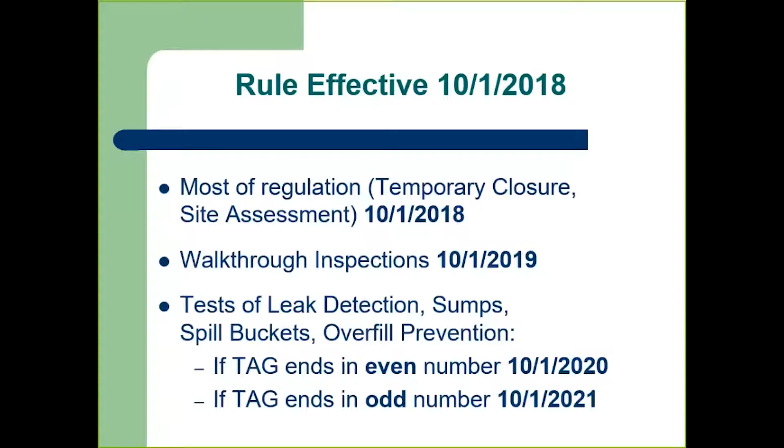Okay. So, exemptions. We did change a major definition in exemptions. So, heating oil tanks have always been exempt. We did change one word in the definition because there has been this little gray area. So right now, the new regulations state tanks used solely for heating structures on the property are exempt from the underground storage tank regulations.

So what that does is it closes this gray loophole for emergency power generator tanks. If they store heating oil, they are fully regulated. So an emergency power generator tank could have waste oil in it. It could have diesel in it. It could have heating oil, whatever. It's fully regulated no matter what kind of product it has in it. So I just want that to be clear.

There are some emergency power generator tanks out there that are not registered with Department of Ecology. So be sure, if you have any of these clients, or if you're a hospital and your tank isn't registered, be sure by October 1st, 2018, you get that emergency power generator tank registered with Department of Ecology and in full compliance with the regulations.

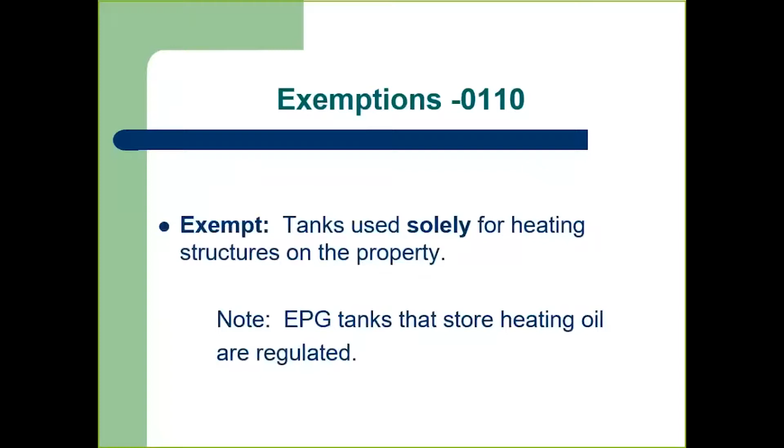Record retention. We've had some changes with that. So for the annual line tightness test, keep the last two tests, 2 years. For walkthrough inspections, rectifier inspections, the monthly leak test, if they're doing a 0.2 gallon per hour test, if they're doing a sensor normal test, all those monthly tank records or line records, keep all of those records for 3 years. We used to be 5 years, so we've shortened the time period for record retention on most of those items. There are still a lot of 3-year tests out there and new 3-year tests that are coming.

So CP tests are normally 3 years, the spill bucket test, overfill equipment, sump test, and if you have a non-safe suction line, those tests are every 3 years. Those records, we want the last 2 tests, which is a 6-year cycle. Okay.

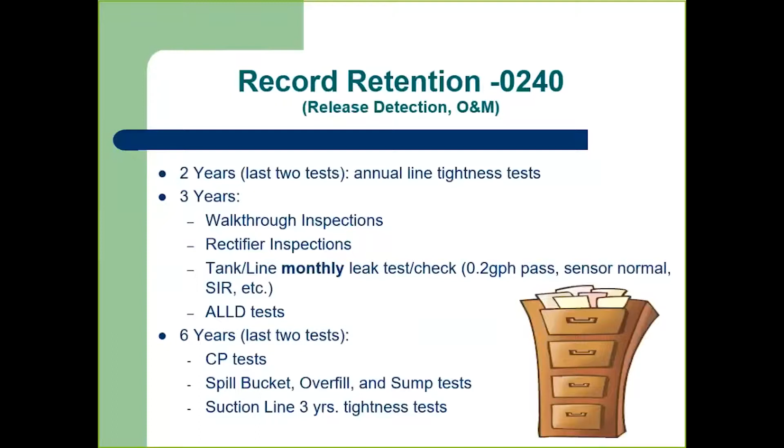Transfer of records. Right now, there's very little information an owner has to pass on to a new owner when they sell their tank site. So now we have a whole list of things that the current owner has to give the future owner if they sell their site. So you can read all this in the regulation, and the little one-page sheet, 2-sided, is a summary of this whole slideshow. So we've got installation repair, compatibility documents, walkthrough inspections, leak detection printout, rectifier inspections, testing of tanks, piping, CP systems, leak detection, spill buckets, overfill prevention, and sump tests, site assessments and cleanup actions.

Last, financial responsibility. So someone yesterday asked, well, how many of these records? So the regulation is silent on that, so we would look towards the record retention section. So if it's 3 years, give them the last 3 copies of the last 3 years. So this will help. Right now, a lot of times when I go to new tank owner sites, they're like, I don't have any records, nothing. So it'll help them become more educated on their new tank system too. A lot of these owners are brand new to tank systems.

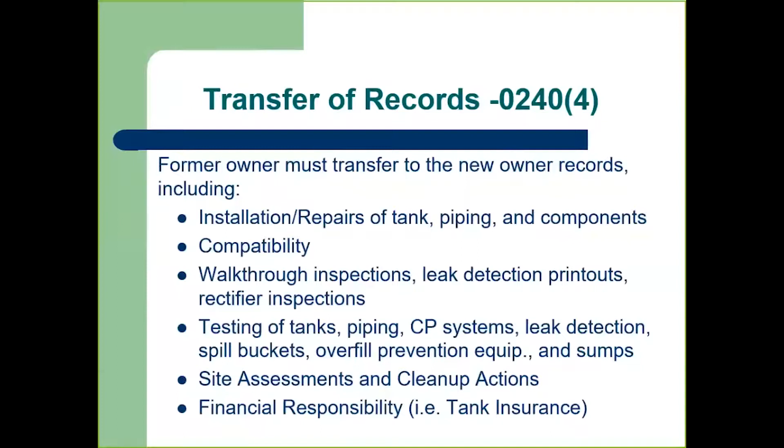30-day notice. Right now, fill out the form as an owner. There's an address on the back. It's an Olympia address. Right now, you need to mail that U.S. Post Office to Olympia. If you wanted a waiver of that 30-day wait time, or if you had a change in the date that you were going to install your tank, you always contact the inspector in your area. So if you're in Seattle, you would contact Drew Imke. He's the inspector for Seattle. So the new regulation says if that install date changes, we want 3 business days prior notice. So you can't tell us Friday about a Monday change. It's got to be 3 business days.

Another change is the 30-day notice was always for new tank installation, but if you were replacing a fiberglass line with a new fiberglass line that was same for same, all you did was use the retrofit repair checklist. Well, now we've added a 30-day notice if you're replacing piping or installing new piping. So we want that 30-day notice of the piping replacement.

Installation changes. Do we have any installers in here? Okay. So right now you fill out your UST addendum, documenting that you followed all codes of practice, regulations, that you did the install per manufacturer specs. You fill out that UST addendum, give it to the owner. Now you're going to attach the manufacturer's tank install checklist, and that's usually a 30-page checklist. Sometimes it's known as a warranty checklist. So if you're installing a Xerxes tank, you fill out the Xerxes 30-page install. You want to attach a copy of that to the UST addendum now so the owner can submit all that to Department of Ecology for their new tank install.

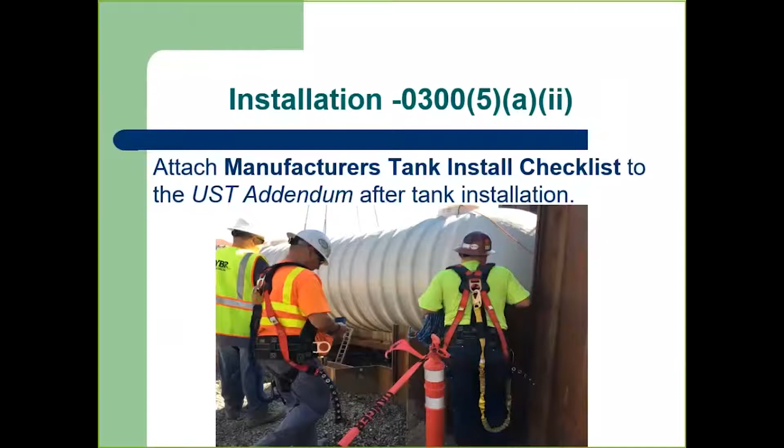Double wall and interstitial monitoring. So, grab some water.

The 2005 federal regulations said all the states had to come up with rules at least as stringent as the feds, and they wanted double wall tanks and double wall piping if any new installs happened. So every state has a different date on this. So if you do work in Oregon or Idaho, this date might be different.

So in Washington State, our date was October 1st, 2012, that you had to have double wall tanks or double wall piping. And why this is really a critical date with these new regulations is this instituted mandatory interstitial monitoring as your primary form of leak detection for your tanks and piping installed on or after October 1st, 2012.

So the new regulations are going to have some things that kick in based on if you're required to do or choose voluntarily to do interstitial monitoring as your primary form of leak detection on your piping; some new regulation is going to come into effect.

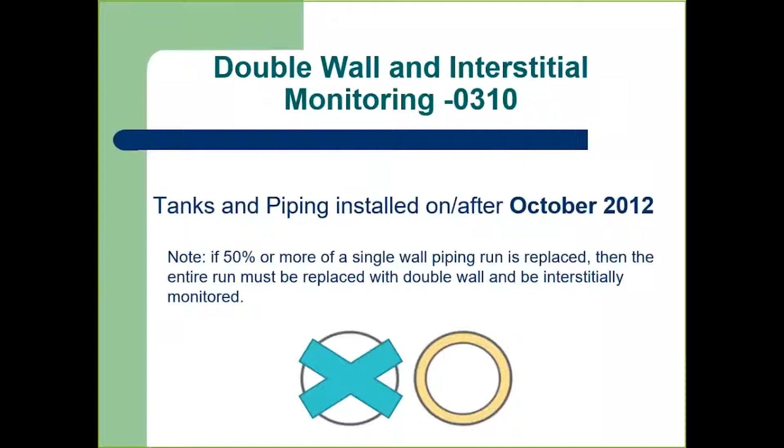So if you have a single piping run and you want to replace 50% or more of that pipe, you have to remove the whole piping run and replace it with double wall pipe. And it must be interstitially monitored. That was October 1st, 2012. So if you do less than 50%, you could just continue on with single wall piping. So 50% is our cutoff for that replacement into a double wall system.

Under dispenser containment, the date here is also October 1st, 2012. If somebody had a dispenser replaced, put a new dispenser on, or just added a new dispenser at a site, they had to have an under dispenser containment sump. And safe suction systems are not exempt from this requirement. So you could do Bravo boxes, you just have to have a containment sump.

People have asked, since there have been some companies going around, can we do a spray-in sump? No, I don't know any manufacturer of any piping that's allowed that next to their piping. So we put in the new regulation that it must be a manufactured sump or like a machine shop sump. I think you've seen a lot of those steel sumps that people can make; a lot of them are at marinas. So spray-in sumps will not be allowed, and that's in the regulation.

Yes. So the question was, would they have to replace the other three that they didn't voluntarily want to replace? Anytime an inspector goes to a site, they're looking at every piece of equipment per our checklist and seeing if that equipment meets the minimum standards, performance standards of the regulation. So we would be looking at a spray-in sump to see if it met the regulations, just as we would be looking at a manufactured sump.

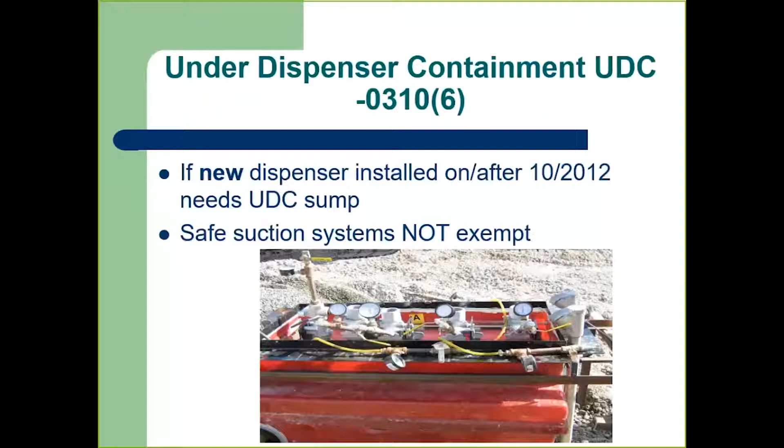Compatibility. Tanks have always had to be compatible with the substance stored in that tank or piping. Now we have an additional part to the compatibility section. If someone is going to switch to greater than 10% ethanol, greater than 20% biodiesel, or switch to a hazardous substance, they must prove through their records, by certification by an independent testing laboratory like UL 971, manufacturer approval, or another option.

A lot of you know how to go onto the NWGLDE website and look up third-party certifications. I think some of the compatibility you're going to be able to find on that website. So if you have an owner that's going to do this, let's go to the next slide.

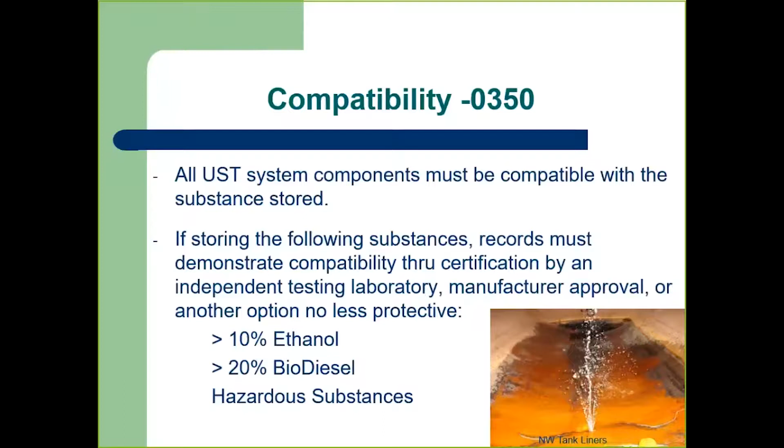The change in product, let's look at the bottom half. If you're switching to greater than 10% ethanol, greater than 20% biodiesel, or a hazardous substance, it now requires, after October 1st, 2018, a 30-day notice prior to switching to one of those products. And we have a checklist already online. It's called Alternative Fuel Installation or Conversion Checklist. And that outlines every UST component that comes in contact with any of these products, and you must show proof that it's compatible with these new products.

Today, a lot of people have gone to blenders. They've gotten rid of their mid-grade tank. They want their mid-grade now to be diesel. They blend. So nothing's changed there. It's still within 30 days of changing that product. Fill out that retrofit repair checklist. Make sure you've changed the floats if they needed to be changed. And just use that retrofit repair checklist within 30 days of switching from gas to diesel. That doesn't need a 30-day prior notice. So I'm not sure the webinar people heard that.

There was a question about E15. Federally, there's been a lot of talk of that happening soon, but in Washington State, there has not been talk of a switch to E15 anytime soon.

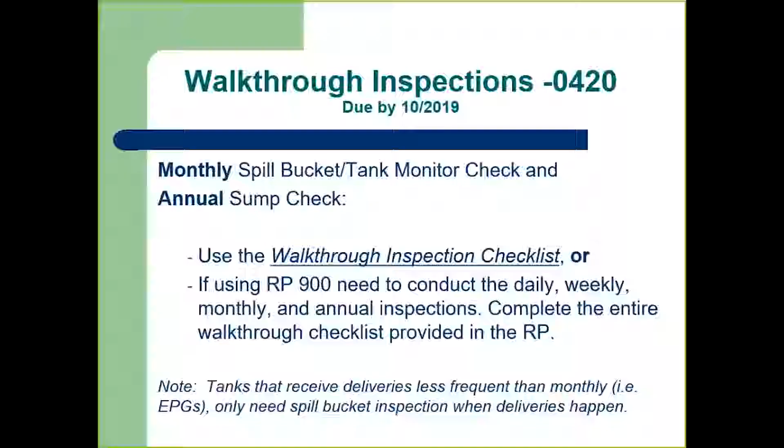Or let's say you go to the rectifier and it's just zero, like you had a lightning strike this week. That happens quite often. You must call your tester or a CP expert within 24 hours. And do we have any CP testers in the room today? Okay. So when they call you, please make sure they schedule an appointment with you to get that repaired or looked at.

The full question was, if we have two dispensers, only one of them was hit, they're both direct bury over soil, they had to replace the one dispenser, put an under-dispenser containment sump due to the regulation October 1st, 2012. Now, because of electronics talking to the meter back in the office, the compatibility, they have to change the other dispenser, which then triggers that dispenser under-containment sump also. So in that situation, both of the new dispenser replacements would need sumps under the dispenser.

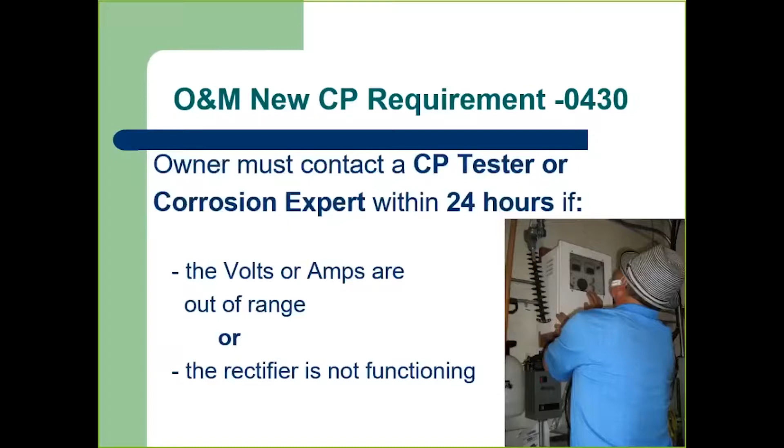Okay, so let's get into the operation and maintenance sump 3-year test. Tag even number ending is due by October 2020. Tag odd, October 2021. So the sump every 3-year test is only required if you are using interstitial monitoring on your piping. So there are some owners that may opt, since their piping is older than October 1st, 2012, to switch to an annual line test. That is perfectly fine. They can switch to an annual line test, don't have to do the 3-year sump test.

However, just to show how we're a little bit different than Idaho or some other states, if you work in both states, please keep your sump sensors in there. Just because you're going to a line test doesn't mean you should get rid of perfectly good equipment. When an inspector goes to your site, they only look for your primary forms of leak detection. So if you have a pressurized system, we're looking at your automatic line leak detector, that test. We're looking at your annual line tightness test. Okay, so you're in full compliance now with your line testing. If you have sump sensors, that's your deal with your service provider. If you have a leak, that sump sensor is going to alarm. So please don't take them out, even if you go to an annual line test.

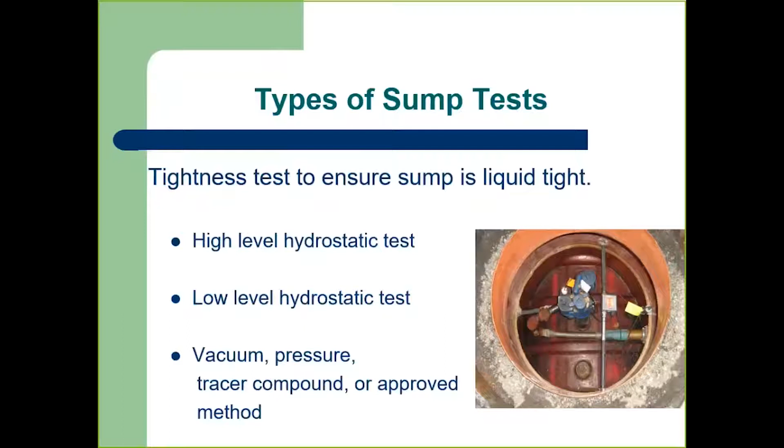So if you're doing interstitial monitoring on your piping, which of those sumps needs the test? It would be every sump in that piping run that's part of the interstitially monitored system. So on your typical, where you have your dispensers at a high elevation, a transition sump, STP sump, low elevation, it includes the dispenser sumps, even a closed loop system, because you have a single wall riser pipe up to the shear valve that's exposed. So that sump is acting as part of the interstitial system. So closed loop systems are not exempt from the sump being tested.

Question. What fluid is being used for the hydrostatic testing? RP 1200 is water. I have not seen a hydrostatic test other than water. However, for the tracer test different compounds are used, but it's more of a vapor compound in a smoke. It looks kind of smoky if you see it done. You can maybe Google that and see some good YouTube videos. If you were around during the tracer test of the tank, it's similar to that but easier. It's not like you had to wait a long time in the old days. This is pretty instant. Okay, I think that answered the question.

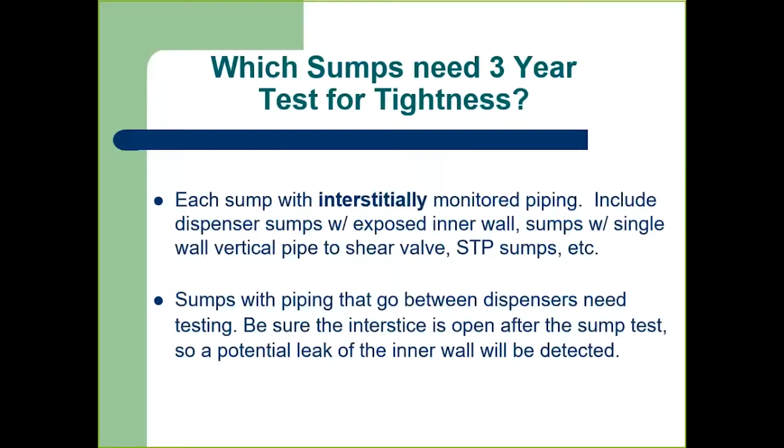O&M spill bucket 3-year test. Same thing for existing tanks. That would go into effect even tag 2020, odd tag 2021. You can follow a manufacturer instruction or a code of practice, or something at least as stringent as that. So a code of practice that's out there is RP 1200. They have a lot of O&M, how to do these tests.

Okay, there is an exception for the spill bucket test. If you have a double wall spill bucket and you have it interstitially monitored and you're documenting that on your walkthrough checklist, every month I'm checking the interstice, inside and the interstice. Then if I've got 3 years of records of those, I don't need to do the hydrostatic 3-year test on that spill bucket because I'm monitoring that interstitial space every single month. So that gets you out of the 3-year hydrostatic.

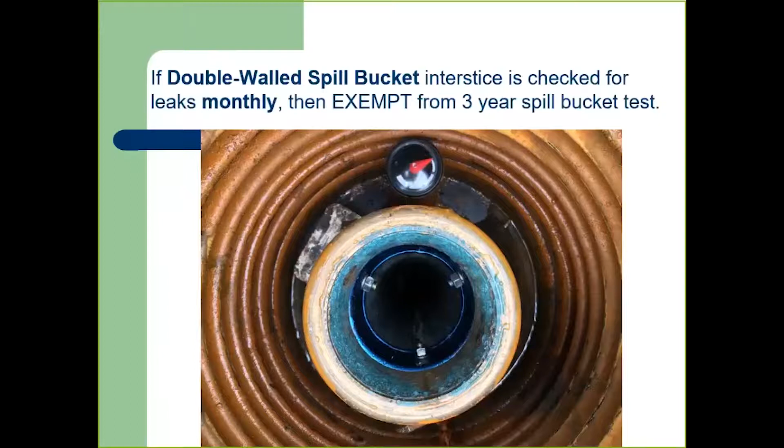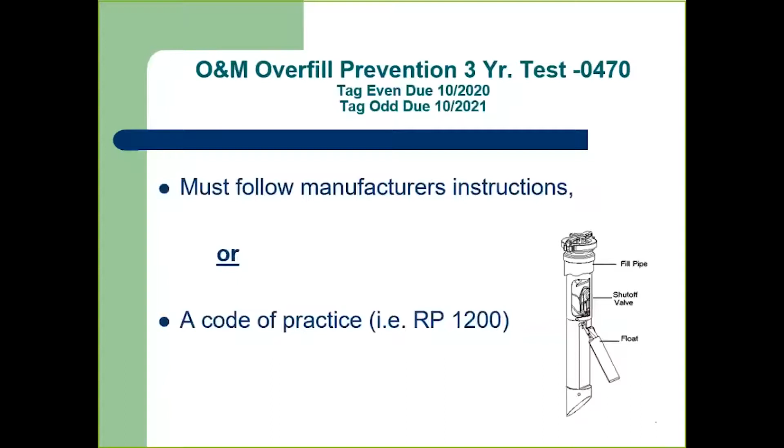O&M testing for overfill prevention devices goes into effect even tag 2020, odd tag 2021. You can follow manufacturer's instructions on how to test that every 3 years, or a code of practice such as RP 1200 has great instructions on how to test each of these equipment. So there's 3 most common types of equipment. So a lot of people in their fill pipes have an automatic shutoff valve.

So contrary to what you may see at some of these tank conference shows, there's a magnetic one. You can't just look down the fill pipe and use your magnet and say, yes, the arm is swinging, because you can't see that arm swinging. So EPA's interpretation is you need to take the entire automatic shutoff tube out. It's got to completely come out.

You've got to check everything, make sure it's per manufacturer specifications. You've got to check the float. Is it warped? Is it smashed? Is the arm working correctly? Or if it's the slide up and down, whatever type of automatic shutoff, it's got to be working per manufacturer specification.

Now, I have heard from service providers that have done this. Due to the ethanol vapors coming up from the tank, it's rusting a lot of these parts, and they're having a hard time getting these automatic shutoffs out. I've seen some pictures where they've had to destroy the automatic shutoff tube to get it out for inspection. So therefore, it's destroyed, and a new one has to be put in.

Do we have any service providers here that have some experience that could maybe say something to this? Yes? We've kind of started doing this a little preemptively. We've come across quite a few, especially the straight ones that don't want to come out. They haven't been removed in years for numerous reasons, and we are destroying them to get them out. They're about $1,000 a piece that we buy them for.

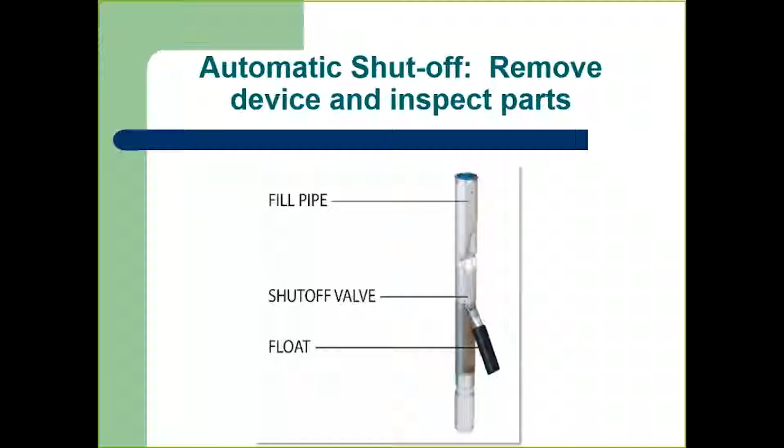What the regulation, operation, and maintenance of your overfill equipment device needs to show during that test is that if I say I'm using my automatic shutoff, that is going to work with whatever tank equipment I have. So that O&M inspection every 3 years has to prove that that is going to activate at 95%. So if I have a hidden ball float valve with a stem at 90%, that is not going to activate my 95% shutoff, even though it appears to be perfect equipment, a float, a moving arm.

So what we had at one of our sites was the ball float disappeared, it got rusted out, but the stem was still in the tank at 90%. The driver just saw the 95% automatic shutoff. So at 2 a.m. when his hose was hooked up and his hose jumped at 90%, he ran back to the ATG: I can put a lot more fuel in this tank. And more fuel and more fuel. All of a sudden, the fuel came up the 90% ball float stem, and the stage 1 vapor recovery went through his hose to the tank, and it spilled out of his hose onto the ground at 2 a.m.

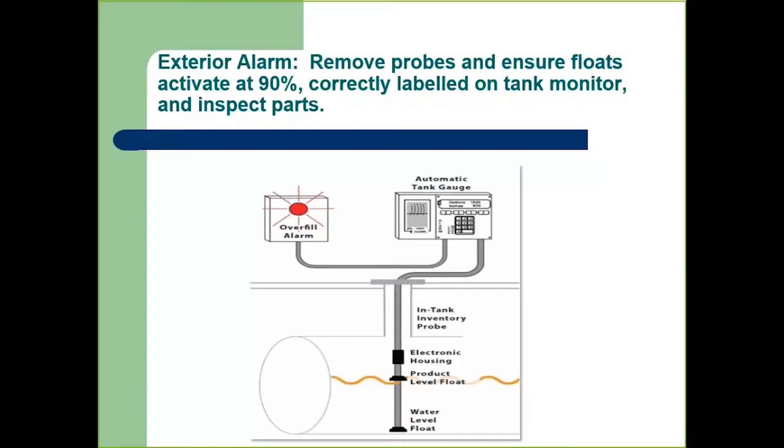Okay, the second form that's pretty common is an exterior alarm. So on this test, this 3-year test, you'll want to remove every probe. Make sure the water floats are good, make sure the correct biofuel or diesel or gas float is used for the product floats, make sure they move freely, and that it activates at the 90% level. So regular, I'm going up to 90%, activate, 90% diesel, on and on. Make sure it's correctly labeled. If you're pulling up the diesel one, make sure it's not the regular coming out of the machine. So, okay.

Ball float. This has also been an area where there's some misinformation out there. October 1st, 2018 is the date that you cannot install a new ball float. So if you have a new tank going in, no new ball float. If you're doing the test, that 3-year test, and your ball float is not functioning per manufacturer's specifications, you cannot repair it or replace it.

So if you have a ball float that's set at 90%, you can't get the stem out because it's rusted because of the ethanol vapors, you have to leave the stem in, then their only choice is to go exterior alarm, because you can't have a stem at 90% and then an automatic shut-off valve at 95%.

Yes? Why can't you lower your shut-off valve to 90% to match your stem? It would actually have to be well below 90% because of how things activate. So you might even have to be all the way to 85%. But that would be an option. A lot of owners might not want that option, but you are correct.

And if no one heard, the question was, instead of going to an exterior alarm if the ball float was damaged or wasn't working, could they go to an automatic shutoff that was set below the stem percentage inside the tank?

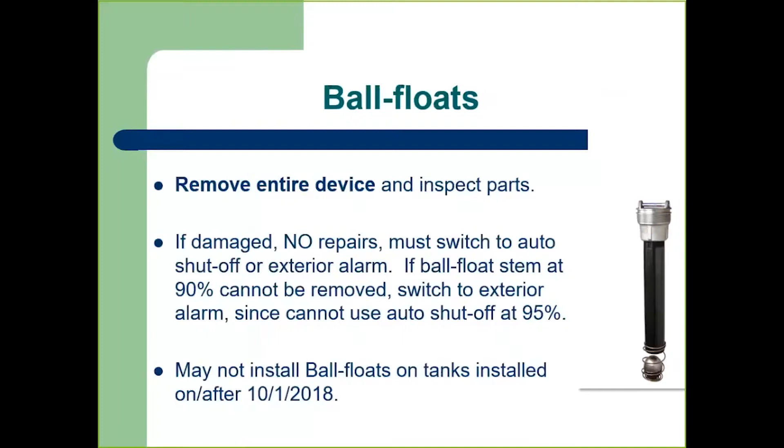So just a reminder, no new ball floats installed after October 1st, 2018. However, every existing functioning ball float can stay in the tank forever as long as it meets manufacturer specifications.

Release detection equipment, that's an annual test. Tag even for existing tanks 2020, tag odd for existing tanks 2021. This is also known, in the industry, as your monitor certification. Crystal's going to go through all this, so I don't want to go through all the different things. But the test has got to follow a manufacturer instruction for whatever type of leak monitor.

If you've got a 250i, you follow what that 250i instruction is. If you've got an Incon 750, you check it per that. So RP 1200 is a code of practice you can use, and you can use that checklist and attach that data to our form.

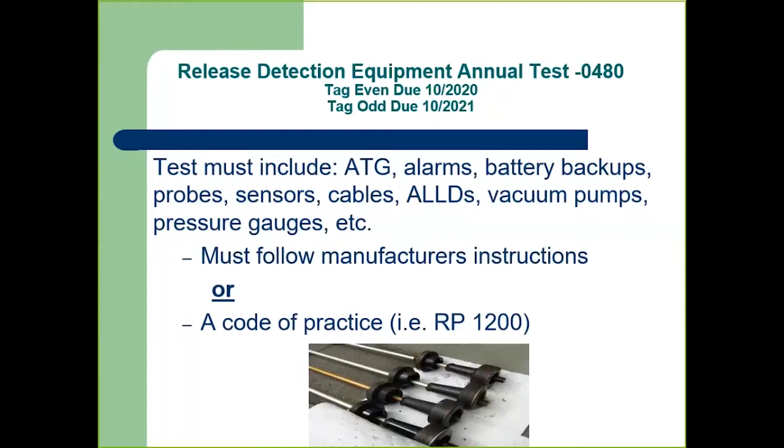Repairs. When you repair part of a tank or a piping, be sure within 30 days of that repair, hopefully before you put any product in it, that you have a third-party certified tank tightness test and/or line tightness test, depending on what you just repaired.

In addition, now that we have requirements on sumps and other equipment, if you repair part of a sump that's used for interstitial monitoring, secondary containment of tanks and piping, like let's say you've got a hole in a piece of fiberglass exterior pipe, whatever piece of UST component you repair, you have to have some type of test to show your repair is good within 30 days. So if it's an interstitial repair, interstitial test. If it's a sump repair, a sump test. Just whatever you repaired, have it tested within 30 days of the repair.

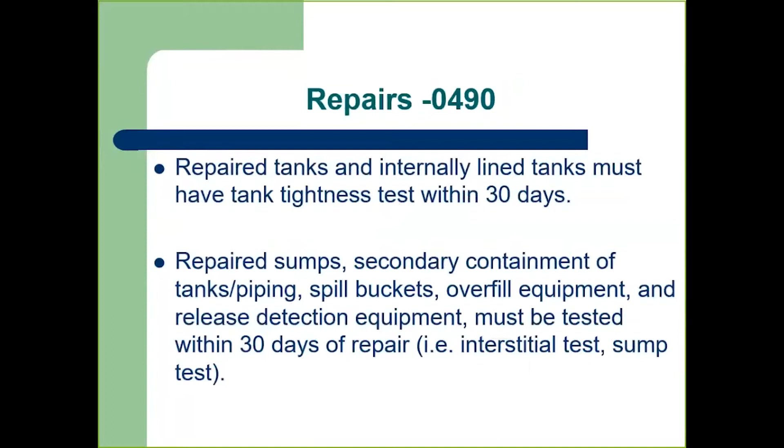Site assessment. Kathy's going to go into detail on the changes in the regulation for site assessments. We used to have the table for sampling in the site assessment guidance. We now created a new table, and it is now in the regulation. It's broken down into 2 sections.

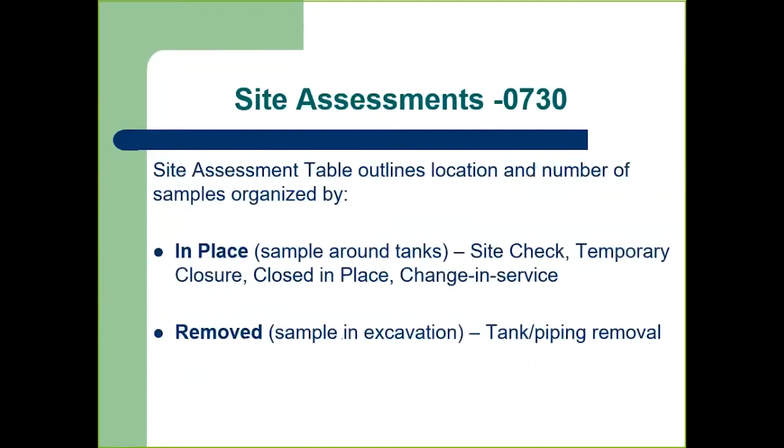One, how you sample if the tanks are in place, with a drill rig. The other half of the table is how you sample if your tank, pipe, or dispenser is removed. How do you do that excavation sampling? So Kathy's going to go into detail on that.

So owners will designate someone to do that monthly check. Crystal's going to go into detail. The annual check, the owner could look in every sump, or if the service provider's there every year, they could use their initials and do that annual sump check for the owners, because service providers usually are safer on site than an owner. So safety number one.

I'm telling owners, whoever they designate to do that spill bucket check, make sure they are protected. I don't want an 18-year-old cashier down on the ground on their knees and be run over by a car. So when I'm on site, I use 2 vehicles to block off the area I'm going to be working at. And those orange cones and tape, that's icing, because people can drive through cones and tape. They cannot really drive through a car. So whoever you designate to do that monthly check, be sure they are safe. And I'm recommending if your service provider's there every year, have them do the sump check for you.

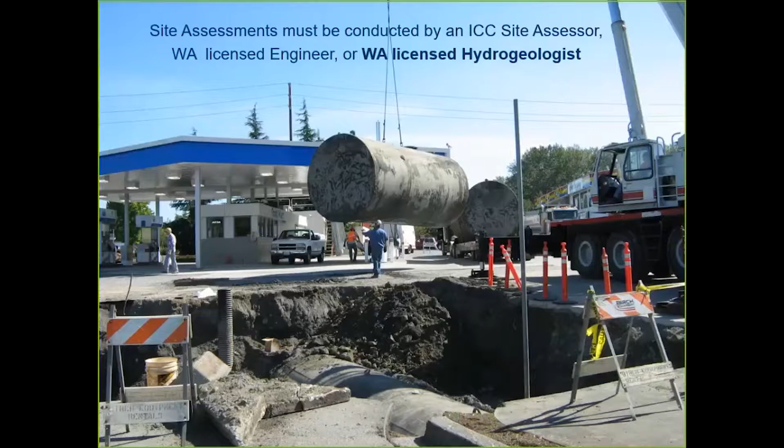Okay, what type of certification do you need for some other testing? So if you have an ICC tightness tester certification, which is known as a U3, or an ICC installer repair certification known as a U1, you can have either one of those if you do an annual test of the leak detection equipment, known as a monitor certification, but complete testing, the 3-year test of the spill buckets or overfill prevention equipment, or the 3-year test of the sumps used for interstitial monitoring. You can have either one of those certifications.

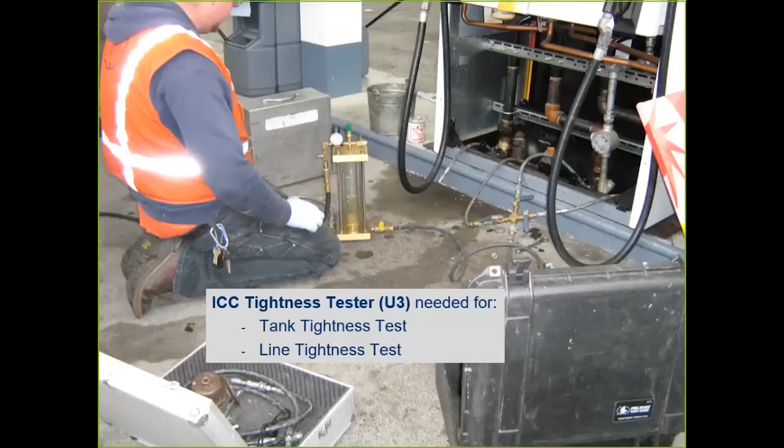However, if all you have is the ICC tightness tester, the U3, you're fully qualified, of course, to do the tank and line tightness test. But if you're an installer, you can't do those 2 tests. You must have the ICC tank tightness tester certification for those 2 tests.

Few changes, or we made it a lot clearer on the CP certification. And if you look at that little handout, I haven't changed a word on your handout. So the first, under 900, an ICC certified tester, known as the U4, can do CP testing, CP install, and CP repair. And there's a little note at the bottom here for all of these. CP install and repair must be designed and under the direction of the CP expert, including rectifier adjustments. So the CP expert does not have to be on site, but you're under their direction. If you're doing an install of new anodes, maybe you're changing the tap settings, coarse and fine.

Okay, second, certifications. If you're an STI certified tester.

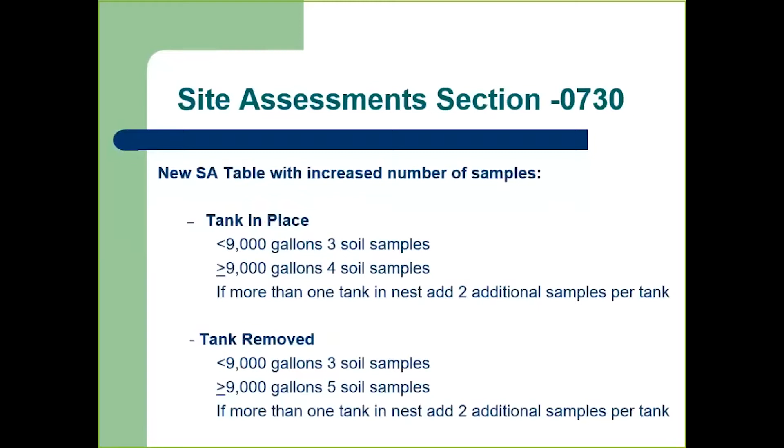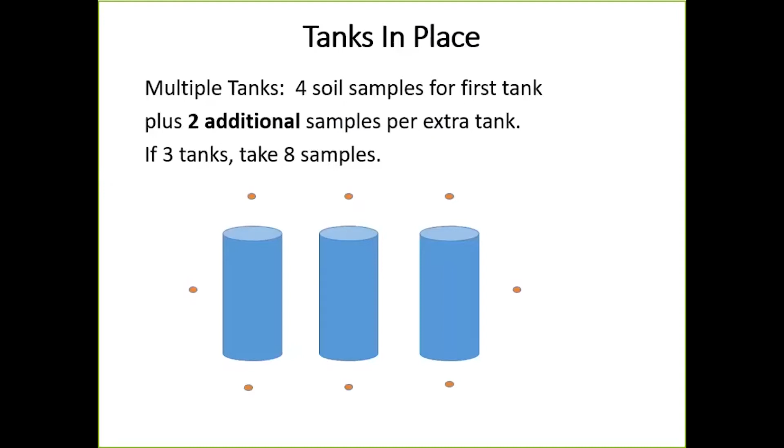All right, so what we've done is we're going to break it down and show you the sampling for a site assessment around the system with the tank still in place. This is an example of 3 tanks. So this would be a multiple tank situation. You would take 4 soil samples for the first tank, plus 2 additional samples per extra tank. So in this example, we've got 3 tanks, so you would collect a total of 8 soil samples.

And for the piping and the dispensers, it would be 1 sample adjacent to, as close as you can get, for every 50 feet of piping, and 1 sample as close as you can get safely adjacent to each dispenser.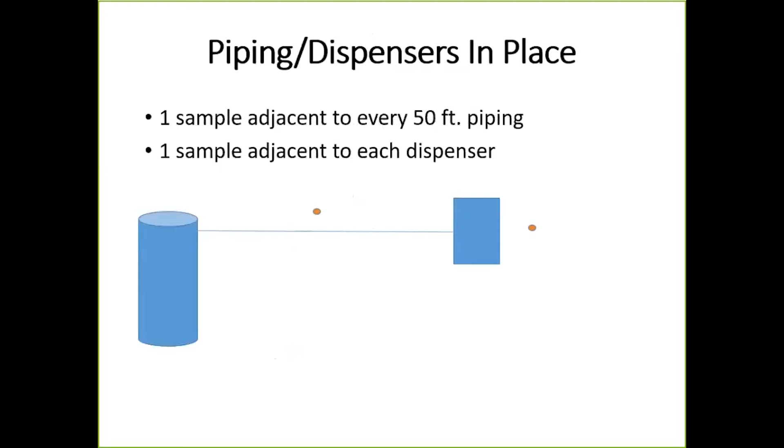And if you have a tank that's greater than or equal to 9,000 gallons, then it's 1 bottom sample, a sidewall where the former piping came in, and all of the rest of the sidewalls. So 4 sidewalls and 1 bottom.

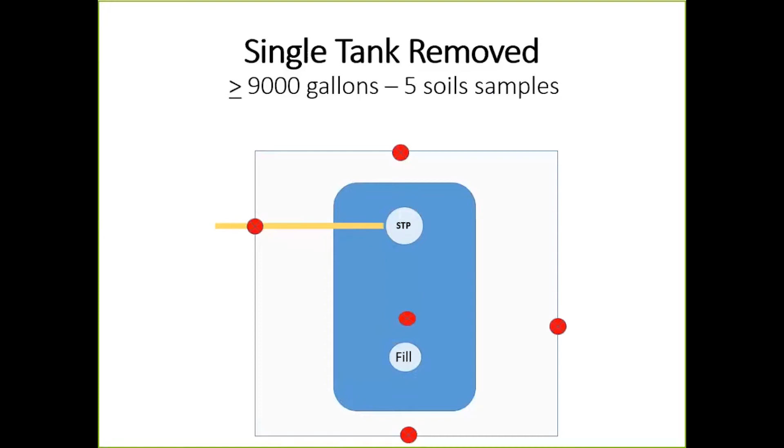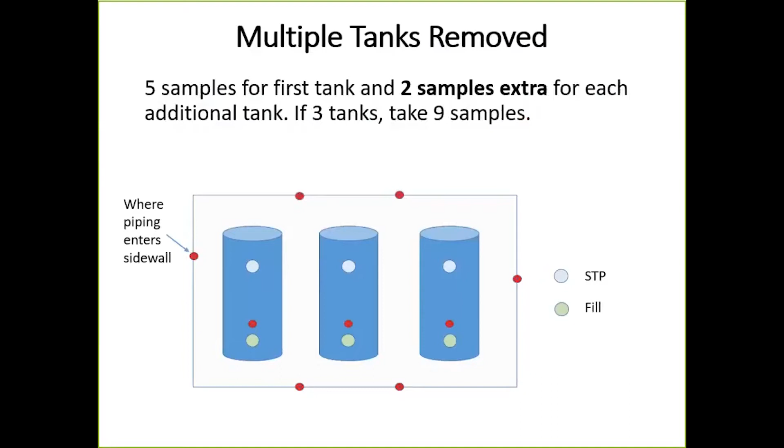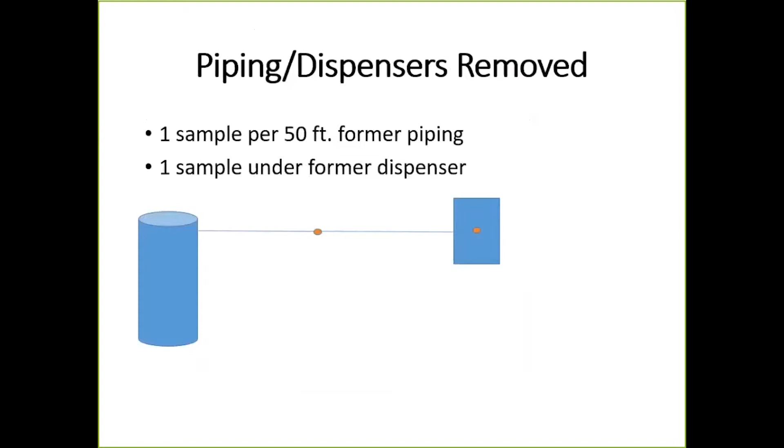And we'll show you a diagram of what it would look like if multiple tanks were removed. You would collect 5 samples for your first tank and 2 samples extra for each additional tank. So here we have 3 tanks for a total of 9 soil samples. And for the piping and dispensers, you're going to collect 1 sample per 50 feet of the former piping and 1 sample under each former dispenser.

And we changed the excavated soils or the stockpiled soils. So for your stockpiled soils, before our minimum was 3 samples. Well, we changed that. If it's less than or equal to 25 cubic yards, 1 soil sample will be sufficient. And less than or equal to 100 cubic yards, collect 3 samples.

Less than or equal to 2,000 cubic yards, you will collect 10 soil samples. And greater than 2,000 cubic yards, your 10 soil samples plus 1 extra per 500 cubic yards. You are allowed to take composites in the stockpiled soil, but we don't want to see composites when you're sampling from the excavation.

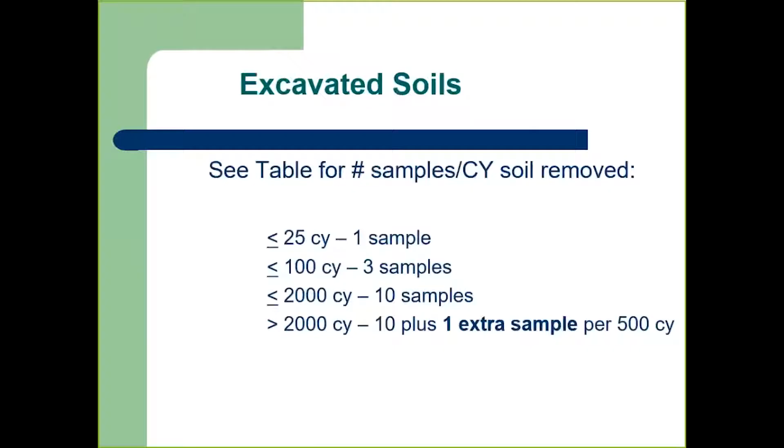Certifications required. Annette touched on this, and I'm going to go ahead and touch on it again. If you are conducting site assessments in Washington State, you need to be an International Code Council certified site assessor or a Washington licensed engineer, and then new, we have approved the Washington licensed hydrogeologist. Does that include geologists? It has to be a Washington licensed hydrogeologist.

Financial responsibility, that's effective October 1st, 2018. And all temporarily closed tanks must have financial responsibility. My sites are federal, so it doesn't apply to them, nor for state facilities. And they can suspend their financial responsibility if they empty the tank and a site assessment is conducted.

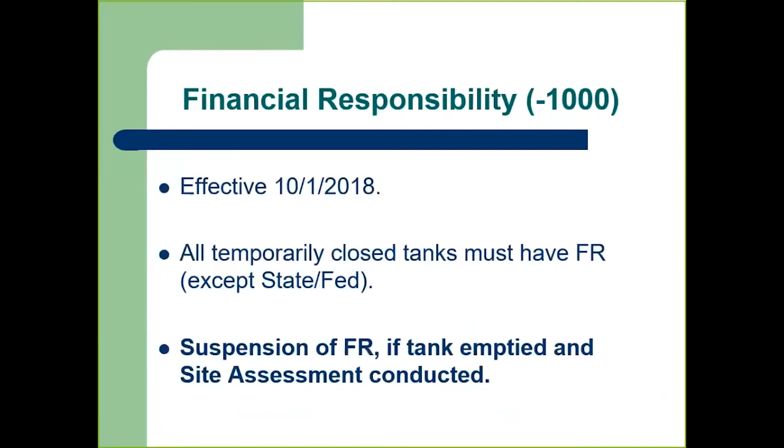And this is a protection for the owner as well, to have that done. Site assessment's a little spendy, but this way it protects them if they find something, and then their insurance will help cover that. And that's it. Short and sweet. Any questions?

Okay, great. Oh, I got one. So for the temporarily closed tanks, if it's closed before the October 1st deadline, do they still need financial responsibility, or is it after?

So the question was, how are temporarily closed tanks that are currently temporarily closed going to be handled with this new requirement? So we're putting a letter together to send to all of the temporarily closed sites at this time. And the short answer is yes, they will need to have financial responsibility eventually, but we're going to work with them on a site-by-site basis to try to find the best option for them to get to that point. Okay, thank you.

All right, so our next presentation is going to cover the checklist. How can I get this open here? And the next presenter is Krista Rodriguez. Krista's a UST inspector. She worked over in the central region based out of Yakima and now Union Gap for a number of years. She's just recently moved into the northwest region and works out of the Bellingham field office. And so she's going to talk about a number of the checklists we have, the most common checklists we have, and go over what our expectations for those are.

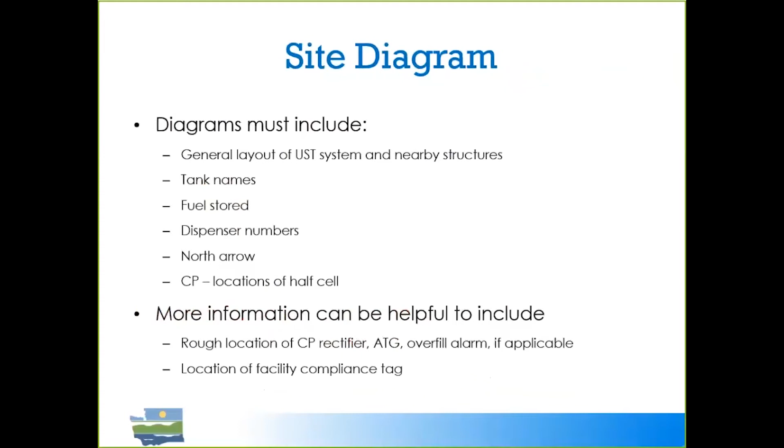Signatures. Each of the forms require the service provider signature and a signature of the representative authority, or I don't remember how it's worded, authorized representative. We may be rejecting those in the future if we don't have some sort of signature from the site, somebody from the facility, and we're kind of working on how to manage that. We know we would prefer to see the signature on that same form if you can get that, and I'm seeing some, oh, that's impossible.

We know this is really difficult, and we're trying to come up with some creative ideas on how we can get that signature so that we know that there's been some communication, we know that they're receiving the failed results. That's the main goal, is we're wanting to make sure that everyone's on the same page. So you can talk to Chris about that. If that's just impossible for you to get that signature on there, Chris is probably the best person to talk to about what's the easiest way for you guys to get that taken care of, or what you can provide to us to substitute for that.

So the next one is the leak testing checklist. As Hugh mentioned, we've got the date right on the top there. That's kind of a goal. We'll get that on all of them when we update them this next time. The leak testing checklist was updated in March 2016, so this should be the form that you're using. And it included a requirement to document the certification type for each service provider, and for you to be including the supporting documentation, so not just the ecology checklist.

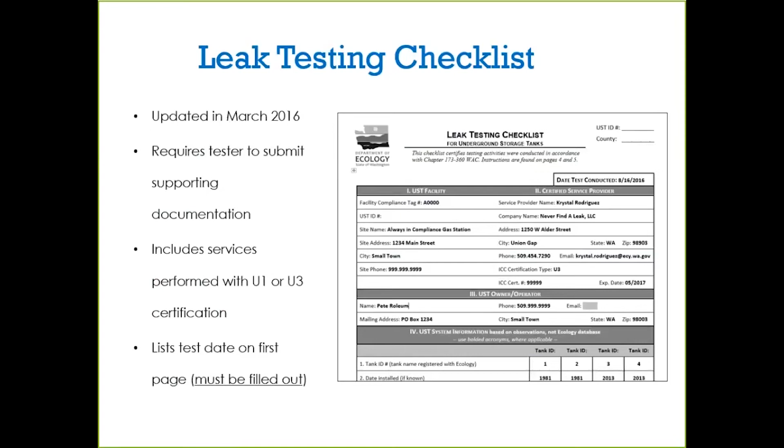This section is sort of the nemesis of everybody. What we tend to be seeing is this section being filled out based on what's in our database. And what we want to see is what you're seeing on the ground, what you're observing on that day. So there are plans to probably change this section, so we're maybe just having the tank ID, capacity, product stored, more information that's really useful to us. Like I said, we want it to be based on your observation.

Question? Yes. For new installation, we do the hydrostatic test at that time when the excavation's open. Then when our paperwork's going to be turned in for the tank information and it's completed, there'll be 2 different dates on it. Is there a spot for that? Because when we finish the job, after we set the dispensers on there, fully operational, it might be 30 days out. So 2 different dates from the hydrostatic test and the tank checklist.

So the question is if there are 2 different dates for a new install on the hydrostatic testing versus maybe the tightness testing of the equipment. I think that you can fill out 2 different forms for that. We want the form to be for one date that all the testing was performed. So if you have completed those on 2 separate dates, especially if they're 30 days or 2 months apart, I think 2 forms would make sense.

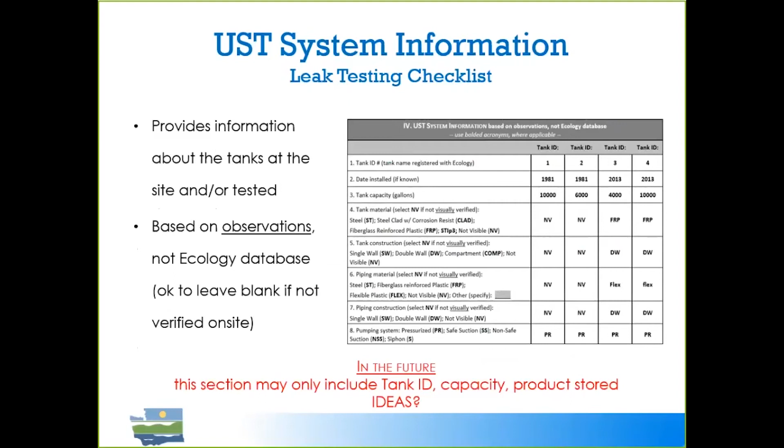So we do know this section doesn't work. So if you have any suggestions on what information you would like to note, you don't have to give it to me right now, but how we can improve on this to document what's going on at the site. I think we all want to make sure you're conveying the information so that we can understand it. We all want to be getting to that place. Anybody have any questions so far?

Okay. This was probably the biggest change to this checklist back then, is we tried to note every single type of test that we expect to see, and some of these will now become requirements. The leak detector, the ALD, automatic line leak detector test, that's been there for a while. We did add noting which method you're using and a date of when you were certified by the manufacturer of that testing equipment. We are requiring that. It's been a little loosey-goosey in the past, but we do want to be seeing that come in.

And then we've got all that spot there for adding comments for the leak detector testing. That would be a great spot to note if there are satellite dispensers that you were testing from that farthest dispenser. You can make a note that there are satellite dispensers and where you tested. And then you can also make a note that if one of your leak detectors failed, obviously you would check the fail button, and then you could say, yeah, but we replaced it and it's working now.

One other suggestion that we've come up with, and I think we'll move forward on, is adding another column, a pass, a fail, and a replaced and now it's passing box. I think that will kind of clarify that, because I think a lot of service providers, or I should say the owners maybe, don't want to see any fails on their checklist. And so we're going to put in a place of what you saw on the day that you arrived, which was a fail, but when you left the site, it's now working properly.

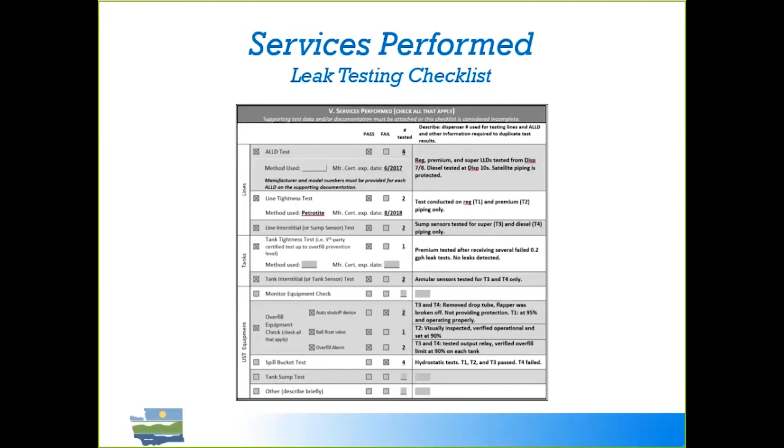So just to make sure, what we're looking for: if satellite dispensers are present, make sure you're identifying that you've tested the leak detector from that farthest dispenser in that product line. We want to make sure that leak detector can detect a leak throughout the entire product line. And if you want to include comments that you visually identified where those solenoids are located, that's also helpful information. Just that you've noticed they seem to be installed correctly, and that leak detector can see the entire line.

The number and locations of each of your sensors that were tested, that you're current with the certification by the manufacturer, and feel free to add any extra comments you want in there. If you happen to not do the tank monitor certification or test, but you want to just note that they have a Veeder-Root 450 or TLS-450, feel free to just make a note of that. But don't check any boxes unless you did the full test, per the regulations.

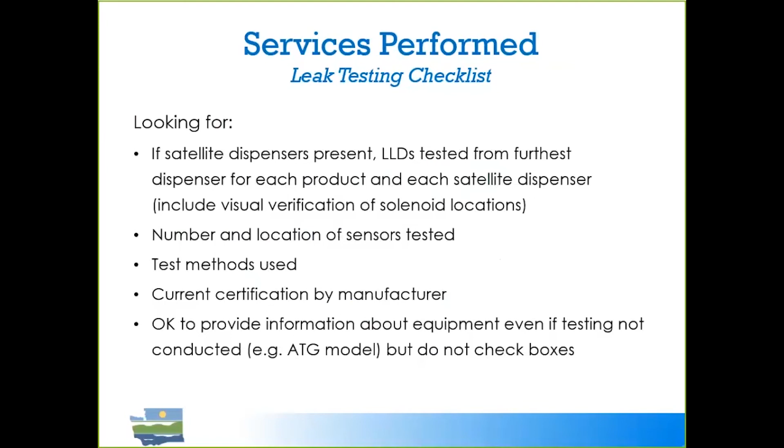A little bit more about the overfill devices. We already discussed this because Steve was asking. You want to make sure that it can activate at the applicable level, so that's 90 or 95, depending upon which method you're using, and it'll activate when that product reaches that level. And we'll be changing the wording on our checklist to call this a test now; right now it says a check, which may have been more of a visual check.

For the tank monitor, it does require removal of the probes based on all these different codes of practice. The regulations don't require that, but all the different methods do. Make sure the proper operation of alarms, the system's configured properly. One thing to keep your eyes open for is the default for the CSLD on the probability of detection for that test method is 95%, but to be in compliance with the third-party certification, it should be set at 99%. We're still seeing a lot of those at the incorrect level, and that test is invalid at the wrong probability of detection.

And also do your service providers a favor. Make sure they're not exceeding throughput, especially when they've got CSLD. You can be printing out that CSLD diagnostics printout, and it'll tell you what their average throughput is on a monthly basis. I just discovered this setting a few months ago, and I was very excited about it. Because if they're exceeding the throughput of the third-party certification, they cannot use that method. So they'll need to find another method, maybe CITLDS or SIR, but with CSLD, they may be maxed out there.

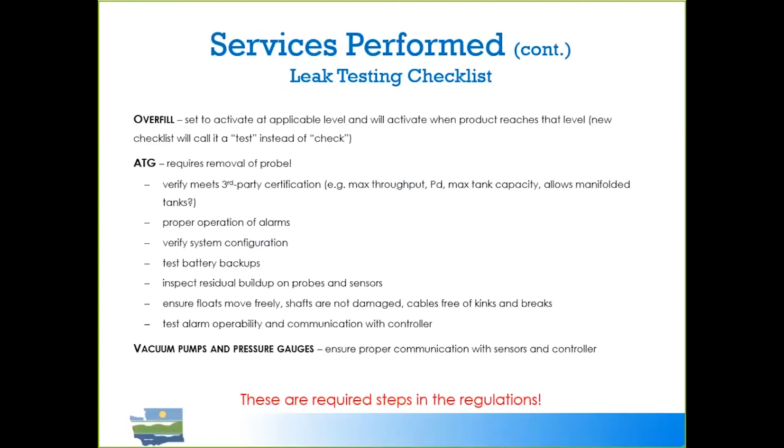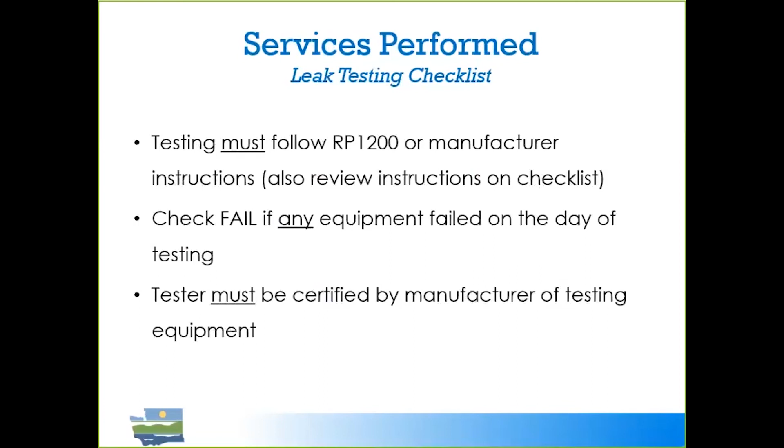So we've been mentioning any of these tests need to follow PEI RP 1200 or manufacturer instructions. Any failed equipment, we want to see failed checked on the checklist, and you must be certified by the manufacturer. You can see I'm repeating these several times, trying to make sure you're listening. And then explain why the testing has been conducted if it's outside the normal testing frequency.

As I mentioned earlier, the tank tightness test is a really common one that we see. Like, why the heck are they testing tank 1? And then somebody will check, we're out here for our normal compliance inspections. Like, no, that's not required for that site. So we do want to just see notes as to why you're out there. It's not so that we can go give them a penalty, but it just keeps us informed. And a line tightness test, oftentimes we'll see just one line being tested.

If you can explain that, or a leak detector, oftentimes they can't be replaced the day that they were being tested, either because it's seized on there or there's not a spare one in the truck. So if there's a reason to go back and do testing on a different day and replace that equipment, just make a note, like, this is a follow-up to the June 6th site visit, explaining why we're out there.

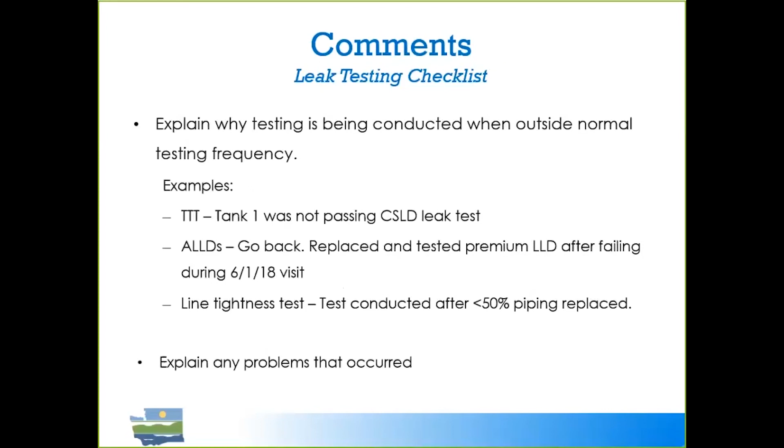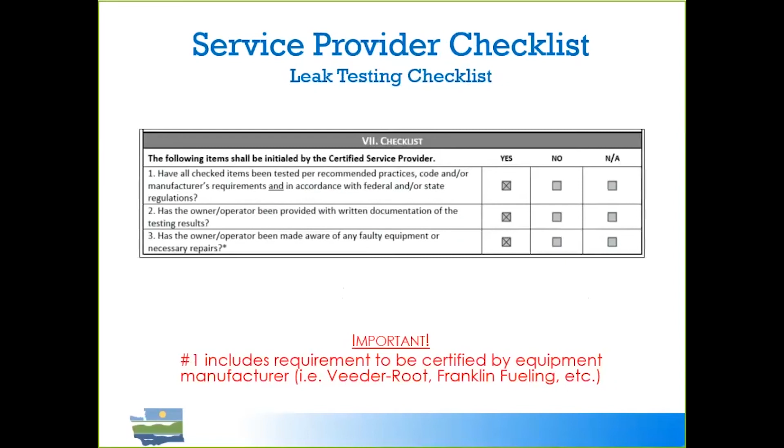And this checklist has a section for the service providers to basically say, we followed all the requirements, the owner's been provided written documentation, and they've also been notified if there's any failed equipment. So you're signing your life away here by noting that you've done that. Any questions or comments on the leak testing checklist before I move on?

All right. So we've got 2 cathodic protection system testing checklists. They were updated last year in August, well, it seems earlier than that. Maybe I have the year wrong. And this helps on our end as far as understanding where you guys are doing your work. We broke down the different steel components that are being tested, and also had a section that includes what the next steps for the operator are. It's more clearly laid out on this one. And I don't anticipate any big changes to these other than putting the date at the top. So if something is not working on this, we would really like to hear from you.

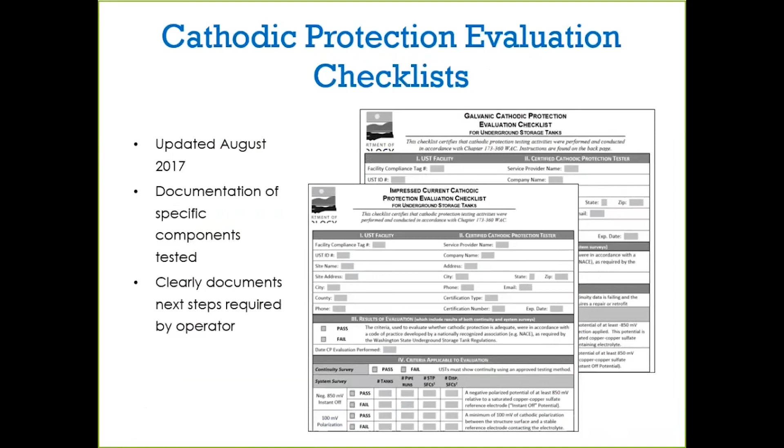As we mentioned, you might be surprised to hear, but it's really common just to see these boxes not checked at all. So just make sure you're filling that out. And right now, until we get this new form done, the date the test was performed is really just tucked away there in that first page. So it's often been left blank. So make sure that you're getting that filled out.

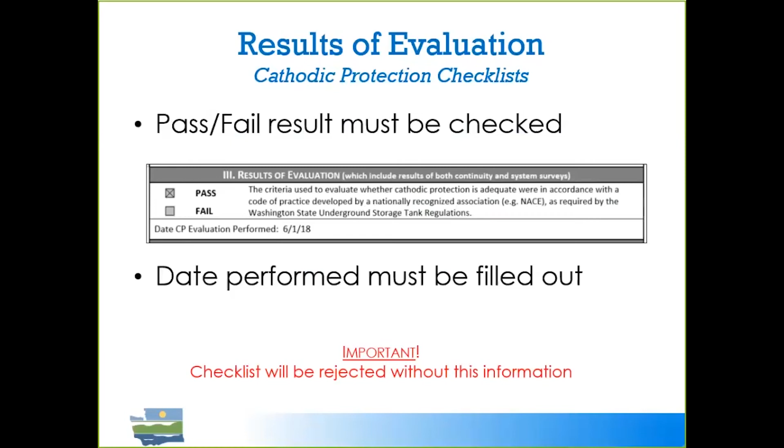Just kind of check over your work before you're submitting it and make sure it's really complete. And if it doesn't have that information, if boxes are not checked and the dates aren't on there, it will be rejected by Ecology.

And like I said, this is one of the best sections I think we added to it, which is really laying out exactly the number of steel components that have been tested. The old checklist just had tanks and piping, and now we broke it down so those flex connectors can be grabbed, or whatever steel portion of piping is on those ends of the fiberglass piping runs. And you've got 3 different options for passing those tests.

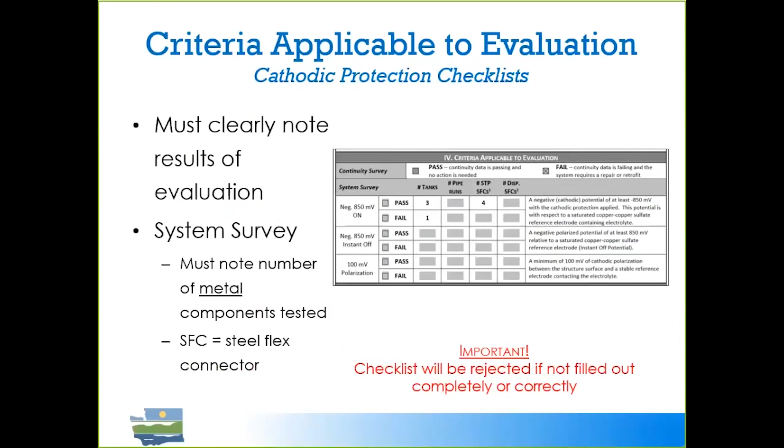And just a reminder that the purpose of the testing is to make sure the anode is protecting the intended structure. So this may mean for a Type 3 tank that there are dielectric unions. We want to be seeing those installed because that is how the cathodic protection system is meant to work. Steel components must be tested against another to prove there's no continuity between structures on a galvanic system, like I was saying with the Type 3 tanks.

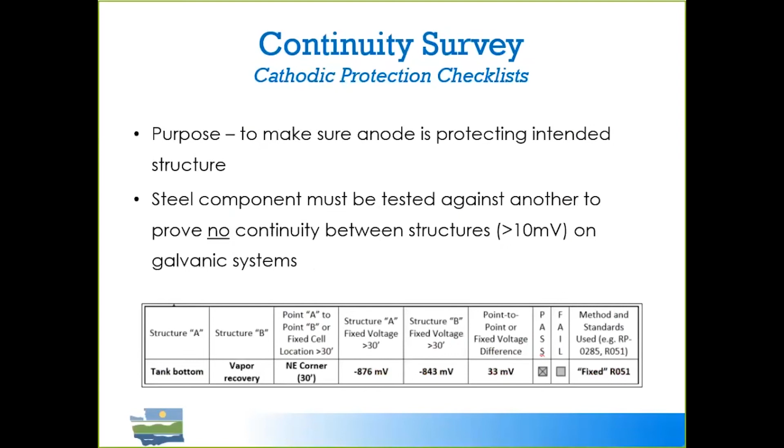Each of our checklists have instructions in them, and they include examples of how each of those lines can be filled out. So just take a look at that and make sure you've got data entered into all the required spots.

For the impressed current checklist, there is an extra page about the rectifier, and this is really important for the owners and operators to know because they're the ones that are doing those every 2 months or monthly rectifier inspections. Every time the CP system is tested, they do need to update the volts and amps readings to make sure they're current, so any adjustments to the rectifier might adjust these numbers. And make sure you discuss that with the owner and operator so that they know which numbers they're looking for to stay within on their monthly inspections.

As I think Annette mentioned, if there are any rectifier adjustments made, a CP expert must approve that change. They don't need to be on site, but they do need to sign the checklist that they've approved those changes to the rectifier.

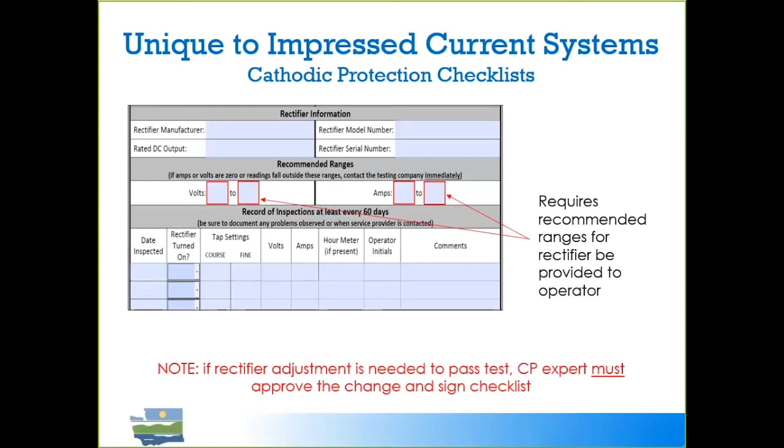So some common errors to avoid: using pre-populated information and basing it on the last time you were out there. It's great if that information is still current, but just double check it each time and make sure that it is what you're seeing that day. Leaving pass-fail boxes unchecked, not including the testing date, checking the pass button even when equipment has failed.

We see that all the time. And sometimes it's tucked way back in on the supporting document. It's like, oh yeah, the annular sensors aren't working. It's like, but you checked pass on the first page. It does happen.

You shouldn't be checking the ATG box that you've done the test unless there's a removal of the probe. And having the CP expert sign the checklist if there's been any retrofits or repairs to that CP system.

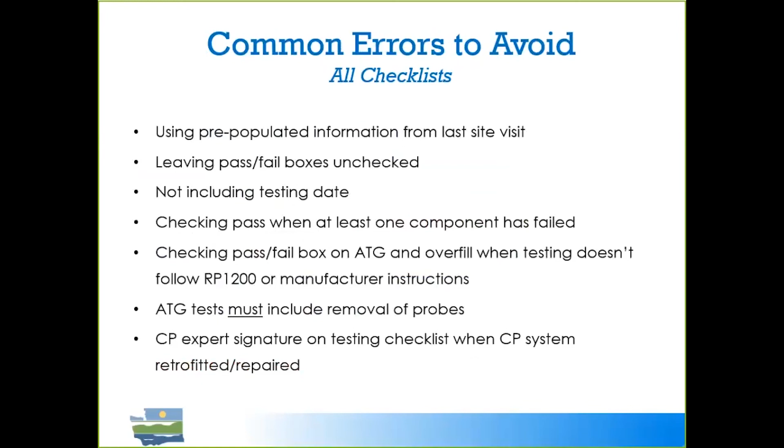So this next slide is about those walkthrough inspection checklists that can be done by the owner or operator. We've got 2 forms that we created. One is for equipment that is single wall, where the spill buckets and the containment sumps are single wall, and they are following the requirements for single wall equipment. And the second one is for double wall equipment when they want to start relying on those gauges, for example. And then we have a separate form for that.

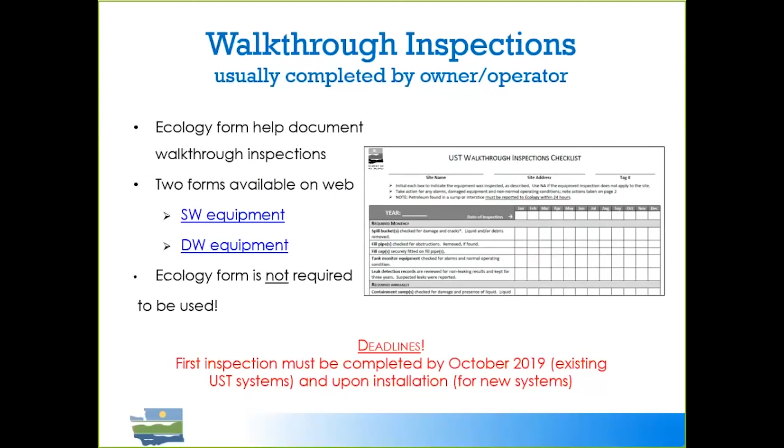This form's not required to be used, but it covers all the requirements. It's a one-shot deal. It's pretty handy. And these are available online. And a reminder that the first inspections need to be completed by October 2019, or upon installation if it's a new system.

So for the 30-day inspection requirement, and this is just, if you're not an owner-operator, you could be just informing your clients on this. They need to be visually checking spill buckets for damage, just like how we do during an inspection, looking at it, removing any liquid or debris that's found in the spill bucket. And if there's a stick in the fill pipe, for example, then that would need to be removed. That's another thing they need to be looking for.

We've also added to it that the cap on the fill port needs to be tight on there. There are a lot of loose ones, so they need to be replaced if the vapors can be escaping. And if it's a double-walled spill bucket, then they could be looking at the gauges on the interstitial space to meet this monthly requirement.

We have a question. It says, what CP checklist is to be used for changing ranges of volts or amps during an occasion other than testing? Oh, I haven't really seen that. So if they've gone out there, somebody has noticed, I guess we probably... CP checklist, yeah, that would have page 5 with the minimum and maximum volt ranges. Yeah, I think they wouldn't need to fill out the whole checklist, but probably just that one page.

Or is the CP test required for making those changes? They would have to test it afterwards, so they would have to fill out the CP checklist. Yeah. So that would document it. And then the signature of the CP expert. Right. Yeah, great question.

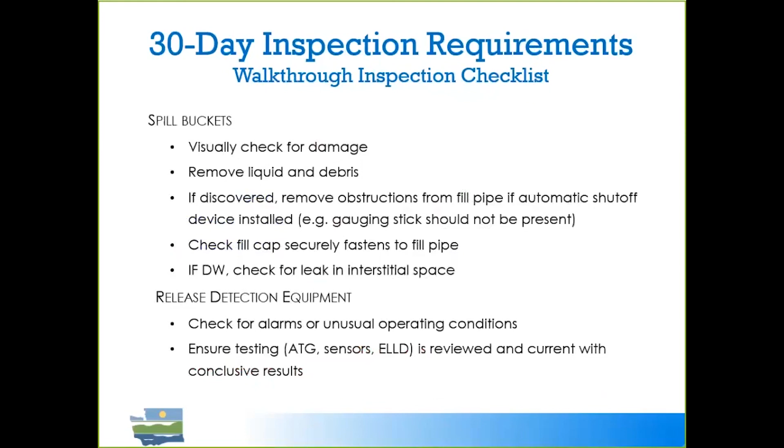We're almost done, guys.

On the walkthrough inspections, the annual requirements include a visual inspection of the containment sump area, removing any liquid or debris there. And if they've got double-wall containment sumps, you can also be looking at that gauge that's on there. If they're using a gauging stick, you'd be making sure that it has 1/8 inch increments, that they're easily visible, and that the bottom of the stick is still in good condition so that the readings are accurate.

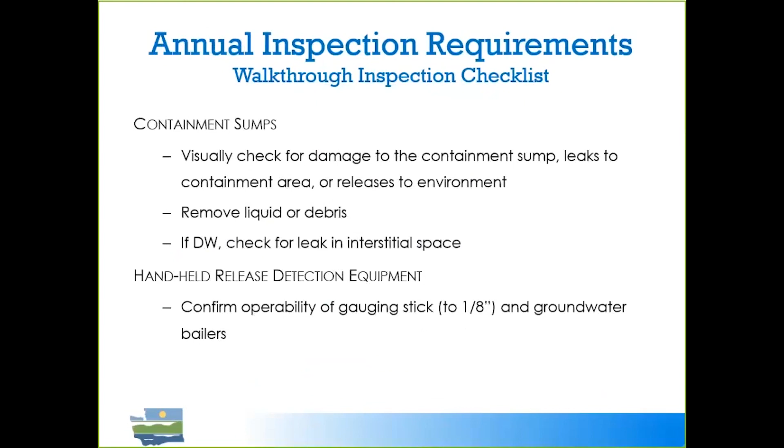So as I mentioned, we'd love to hear from you. You can surely get in touch with me if you have any suggestions on how to improve our forms. I think we'll be trying to do that in the next several months or soonish. So if we don't have any big changes, that can happen pretty quickly. But yeah, I'm certainly a good person, or just get in touch with your inspector and ask them to pass it on.

So this TCP External Document Submission Portal, or as we're calling it, TED, is a way for you to submit your checklists as owner-operators or as service providers. Submit them electronically, so we no longer must have a hard copy of these checklists. And so this is going to be really nice. We're now accepting PDFs, so it can be a scanned version of the checklist and all the supporting documents.

Right now we're just accepting 4 checklists: the 2 CP checklists, the leak testing checklist, and the retrofit repair checklist. Those are the 4 most common ones we see. And we're going to just kind of see how this works. And then we're hoping to add on some new ones like the 30-day notice, maybe the permanent closure checklist, and the site assessment checklist. We're definitely planning to expand it, but we're going to start with these 4 right now.

For the testing checklist, it'll go through a 2 review process. One will start at headquarters, and here are 2 headquarters folks. They will be reviewing them as they come in and checking to make sure kind of more the basic information is in there. They know which site it belongs to. It's got a test date, pass and fail boxes are checked, signatures are on there. After they're done reviewing that, it'll go to the inspector for that area.